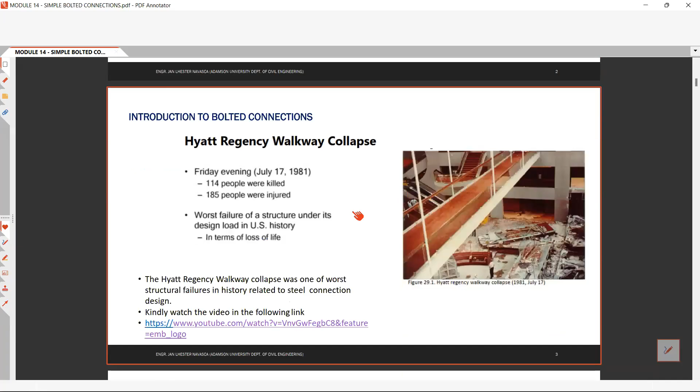So we have the Hyatt Regency walkway collapse. It is the most destructive, the worst.

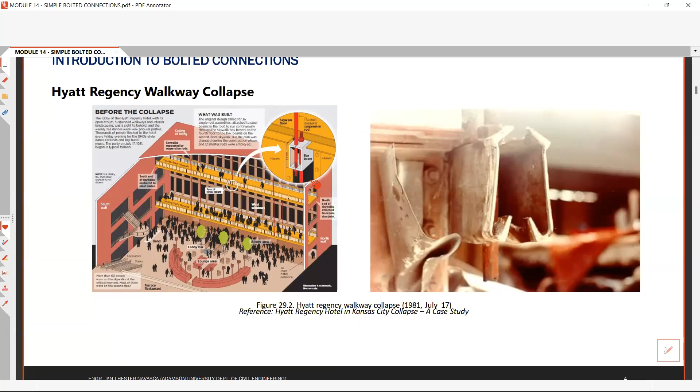So what happened at this walkway? It is a walkway on a three-story building. They have a walkway on the second floor and a walkway on the fourth floor. So what happened in the Hyatt Regency walkway collapse? According to the investigation, the design implementation, the construction or the implementation of the design was not implemented correctly. The plan was not followed.

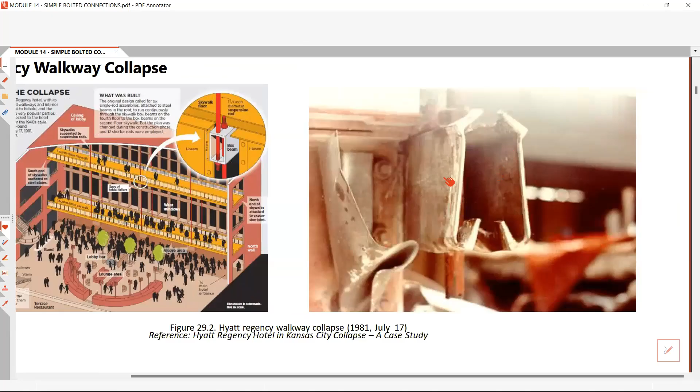As you can see in this figure on the left, they have a box beam. The box beam failed by tearing apart. Notice that your box beam tore apart, because the box beam was not designed in this manner. In the first design, the original design, the continuity of the tension rods and the bolts should be in a continuous manner. So this is the original design.

In the original design, in your box beam, let's say this is your box beam, the flow of the load path, the load path of the tension rods should be in continuity. The tension rod and bolts should be continuous all throughout.

Just like this one. However, in the construction, the contractor changed the initial design to discontinuity. So they have a tension rod on this point, and on the second, they separated the continuity of the load path.

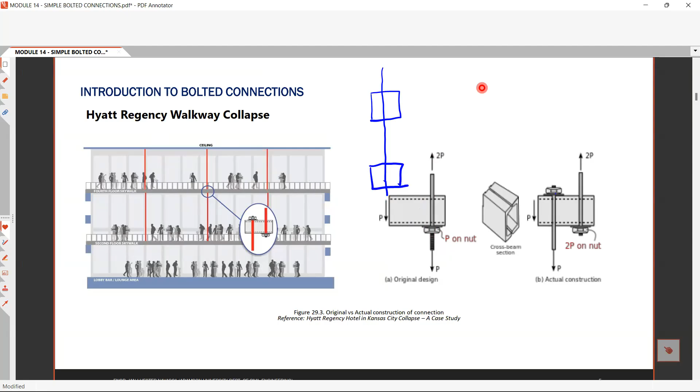So what will happen? If we try to examine the free body diagram of the walkway, in the original design, the tension rod should carry the load, this 2P and P on the other side, and so summation of forces vertical equals 0: the 2P, then your P at the bottom. So P plus P, therefore considering this force diagram, your bolts carry the load P.

However, in this actual construction, the load on the bolts is doubled, because they discontinued the load path. So if you check, when you apply a load P over here, then also over here P, so summation of forces vertical, you have 2P on the bolts. That is why you have 2P on the nut on the fourth floor.

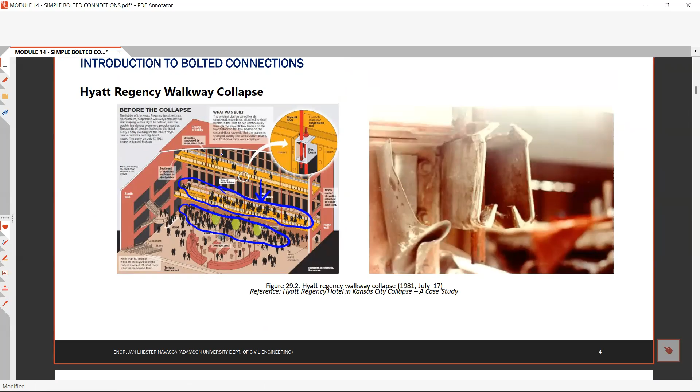Okay so that is the importance of construction implementation, because you need to really check the design and the construction. So whatever is in your design, this has to be properly implemented in the construction.

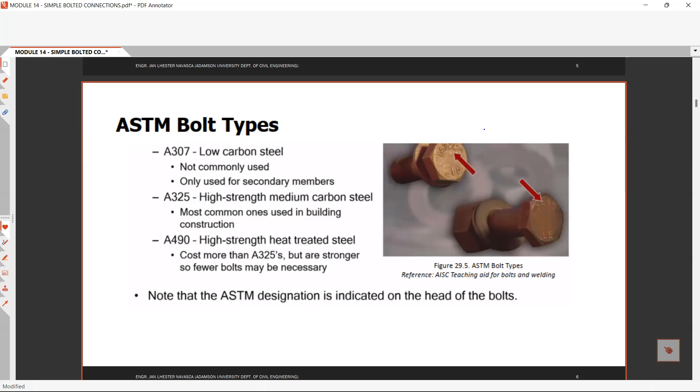Also, for the ASTM bolt type, we have the A307 machine bolts with an FT of 45 KSI, where FT means the tensile capacity of your A307 machine bolts.

So when you look at the AISC 15th edition, the bolt types are classified into Group A and Group B. In Group A, which is the high strength bolts, the tensile capacity is 90 KSI. And for Group B, it is also a high strength bolt, with a tensile capacity of 113 KSI.

So what are the ASTM bolt types under Group A? The ASTM bolt types under Group A are the ASTM A325, the A325M, F1852, A354 grade BC, and the A449.

And the ASTM bolt types under Group B are the ASTM A490, the A490M, the F2280, and the A354 grade BD. Again, FT is the tensile strength from the AISC table, which you can check in table J3.2. Take note that F1852 and F2280 are tension control bolts, or twist-off bolts, which require a special tightening tool.

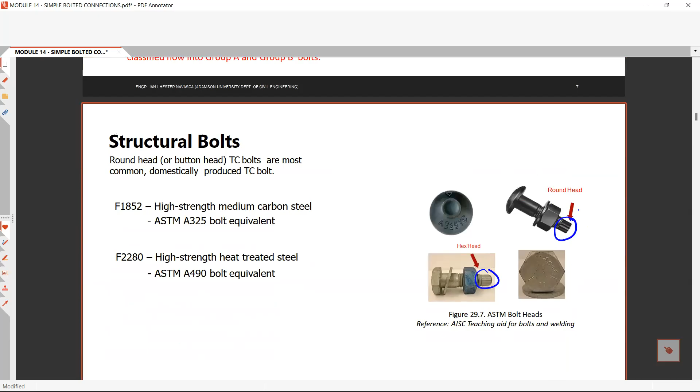Then we also have the round head, like this structural bolt. So we have a round head and a hex head. The round head types are the F1852 and the F2280.

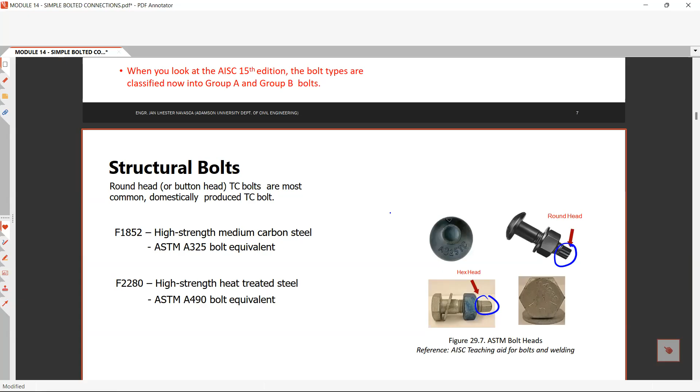So if we compare the F1852 to the ASTM bolt type, the equivalent of F1852 is the ASTM A325 - it is its bolt equivalent. And for the F2280, we have the ASTM A490 as its bolt equivalent.

Okay, so let us check the anatomy of a bolt assembly. This portion is what we call the head - this is the part you will see on the surface of your structural steel connections. We also have the total length of the bolt.

This is your total length of the bolt. So if the structural plans indicate the length of the bolt, it means the length is measured from the bottom of the head up to the tip of your bolt assembly. Then, between the length, we have the non-threaded part, and we have the threaded part.

Also, if you tighten the nut of your bolt assembly, this is the total grip distance. For example, if you have a timber or wooden structure and you need to tighten the nut, you need to create the bolt connection. So what you have to do is tighten the nuts, and the distance of your tightened nuts is the grip - that is the grip distance, the distance that holds the bolt assembly together. That is what is called the grip distance.

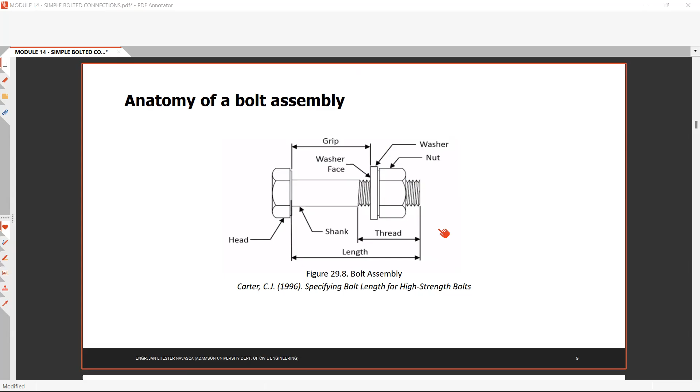So what are the standard dimensions for the ASTM bolts? In this table, check the AISC manual, table 7-14. In the AISC manual, the dimensions of the high strength fasteners are in inches.

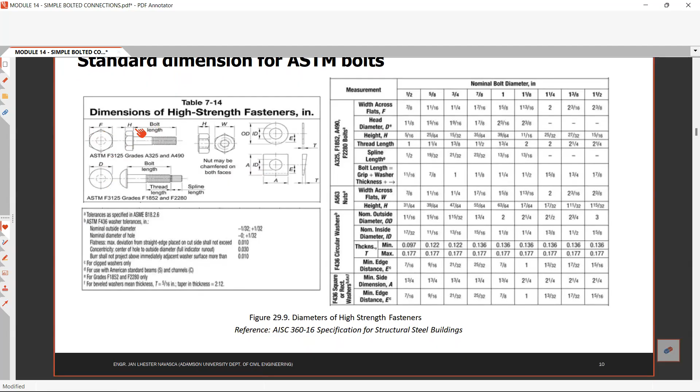It has a notation F, which is the width across the flats. We have the notation D, which is the head diameter. We have the notation H. The notation H is basically the thickness of your bolts, the thickness of your heads, the thickness of your head bolts. And thread length is the total length of the threaded part. Also we have the bolt length, which is the grip distance plus the washer plus the thickness, or basically the length of your bolt.

So in this table, we have the standard dimensions for the ASTM bolts, depending on the ASTM bolt type and the nominal bolt diameter. Let's say for example we have a bolt diameter of 1/2. So when you check the standard dimensions of 1/2 inch ASTM bolts, it depends on the ASTM type.

So let's say we have ASTM A325, 1/2 inches. If you check the standard dimension of that ASTM bolt, we have 7/8 width across the flats, a head diameter of 1 1/8, a height of 5/16, a thread length of 1 inch, a spline length of 1/2, and a bolt length of 11/16 inches.

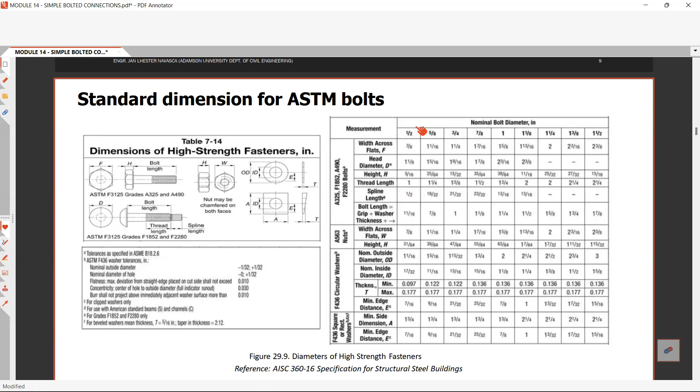So this is the head diameter. As you can see, the head diameter is always greater than the bolt diameter. This is your bolt diameter, and this is your head diameter.

So we have categories based on the performance of your bolts. We have a bearing type connection and we have the slip critical type connection. The bearing type connections are simple bolted connections in which the load is transferred by the bearing force on the bolts. And the slip critical type of connection is where the load is transferred by the friction in the joint.

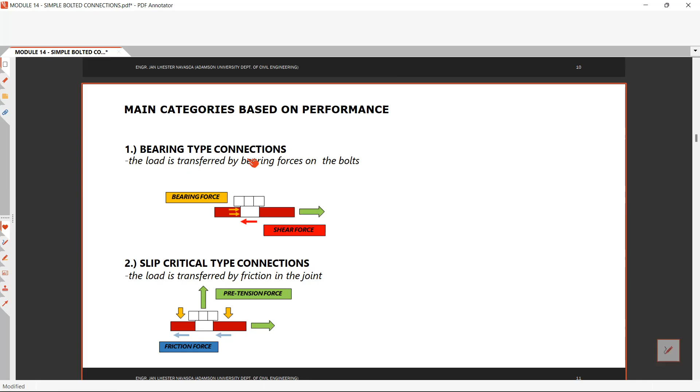So this is the slip critical and this is the bearing type connection. So basically, the bearing type connection means you are allowing your bolt to slip. That's the bearing type. And the slip critical type of connection means you will not allow your bolt to slip. So what are those?

Let's say you have slotted holes, and on your slotted holes you have a bolt. This is your bolt. So if you have a bearing type connection, based on your assumption, you are allowing your bolt to bear the force on the edge of the holes, here at the slotted holes.

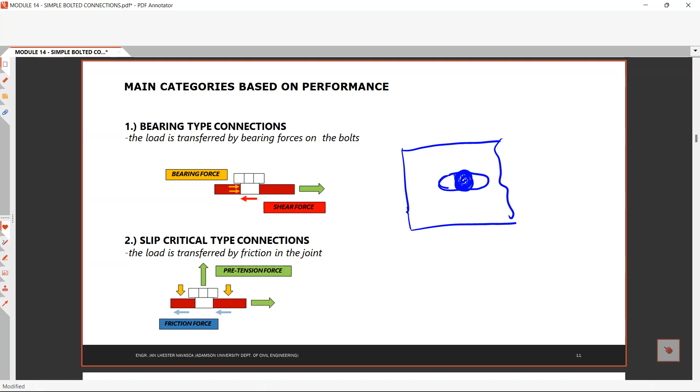You are allowing it to slip, meaning it can slip on this side, moving a certain distance. So this is exaggerated, but you will allow a bearing force. Your connection is designed to resist that bearing force.

However, for the slip critical type connection, you are not allowing your bolt to create a bearing interaction or bearing stresses at the holes. So by the word itself, it is critical to slip. This is also an exaggerated figure, meaning your hole should not slip. Therefore, you need a pretension force, a high pretension force.

Your pretensioning force needs a special tool. So when you have slip critical type connections, a wrench is not applicable for tightening your bolts. You need a special tightening tool and you need to check the pretension force, and that pretension force will cause a clamping force in the bolt type.

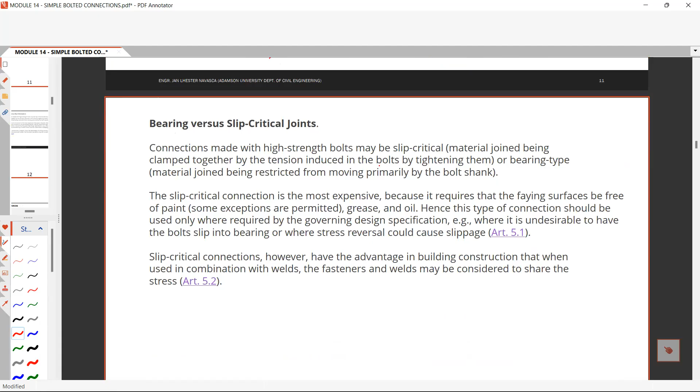Connections made with high strength bolts may be a slip critical type, with the material joined clamped together, or a bearing type, which is a material joined restricted from moving primarily by the bolt shank. That is the bearing type.

The slip critical type of connection is the most expensive because it requires the faying surface to be free of paint, with some exceptions permitted, grease, and oil. This means the slip critical type is most expensive because you need to recheck the faying surface under your bolt type connection. You need to recheck this because it should be free from paint, except red oxide paint, grease, and oil, because these will cause unnecessary frictional coefficient, lowering the frictional force in your clamping for your slip critical connection type.

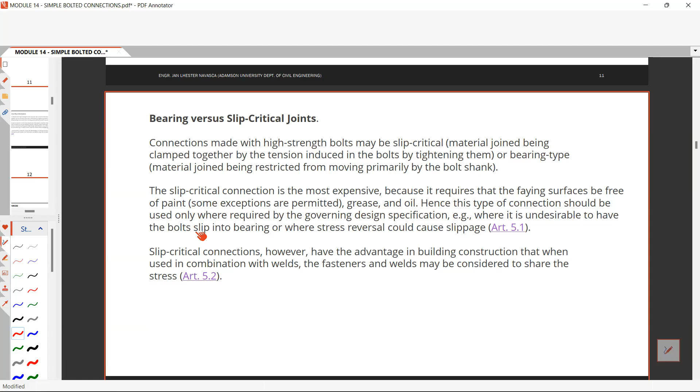This type of connection should be used only where required by the governing design specification, for example where it is undesirable to have a bolt slip into bearing, or where stress reversal could cause slippage. Slip critical connections have the advantage in building construction that when used in combination with welds, the fasteners and welds may be considered to share the stresses. Since slip critical connections require a special tool, a pre-tensioning force, and a controlled environment, they have this advantage in building construction.

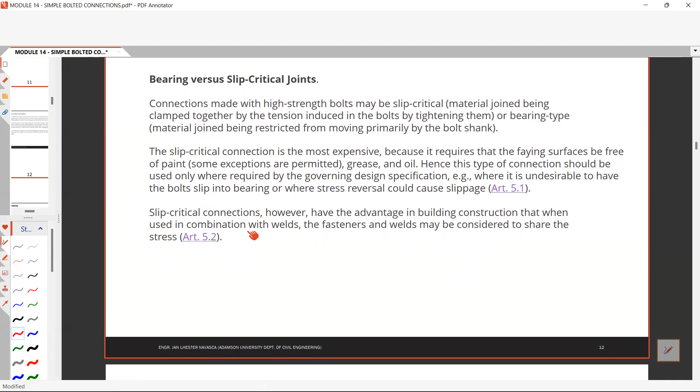So let us understand what the bolt forces are. Because of the nature of structural bolts, we generate three forces in a bolt assembly: the shear in the bolts, the bearing between the bolt and the plate, and the friction between the faying surfaces of the connection elements.

The shear in the bolt is the shear right here in the bolts. The bearing between the bolt and the plate is here. And the friction between the faying surface and the connected element is this one. Let us consider all these bolt forces.

Let us consider the bolt forces. For example, we have a tension force in our bolts. That tension force comes from the actual load conditions, in our bolt assembly. So we have a bolt and we have the connecting element.

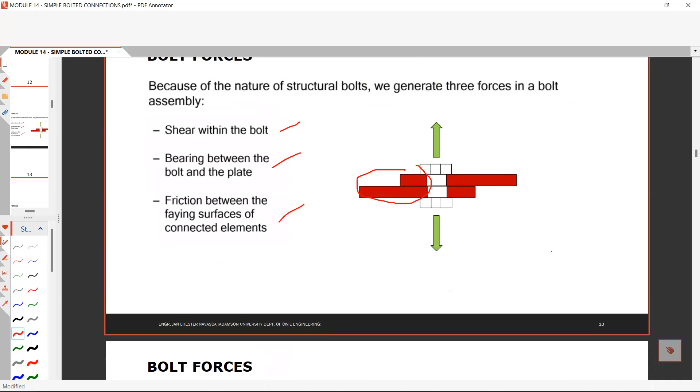When you have a tension force applied on the bolts, by reaction forces, you have a clamping force, right? That clamping force is this yellow arrow, your clamping force in the bolt assembly. So by summation of forces vertical, the tension force should be equal to your clamping force.

Then, let's say for example you have a tension force on the member, if you recall in our prelims, this type of connection, then you apply a tension force T. If you want to check the capacity of your bolt, to design the bolts under an actual loaded tension member, let's say this is your tension member with tension force T.

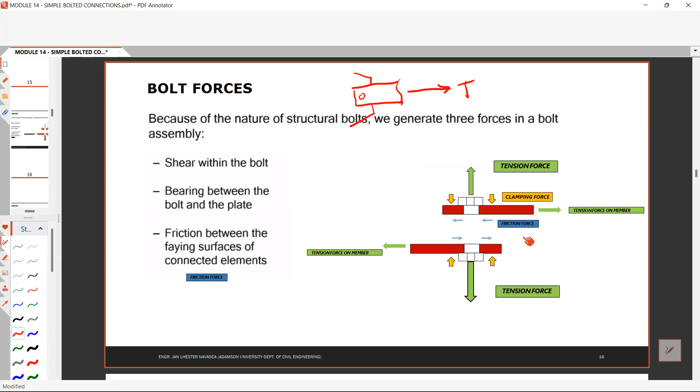By summation of forces along the horizontal, or by equilibrium, the reaction forces are the frictional force between the faying surface of the connected element, this blue arrow. Consider the bottom part of our connection: you have a tension force on the left, a frictional force on the right. The same on the upper part: tension force on the right, friction force on the left. That friction force equals mu times N, your friction force.

Then we have the shear within the bolt. Since you have a frictional force, that frictional force will pass through the bolt, within the bolt. That stress will pass through the bolts, therefore you have a shear within your bolts, right below your bolts within your bolts. That is your shear force.

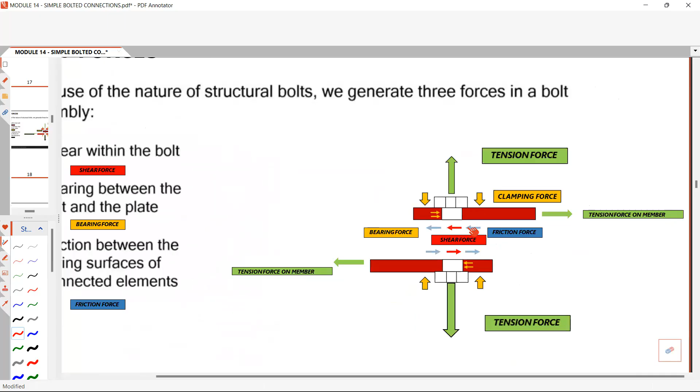For the bearing between the bolt and the plate, since you have a shear force within the bolt, that shear force will cause a small lateral movement on the bolt. Therefore, you have bearing stresses right between the bolt and your connecting plate, just like this figure. If you check your holes, this one is your hole, your bearing is the stresses here, acting on this side.

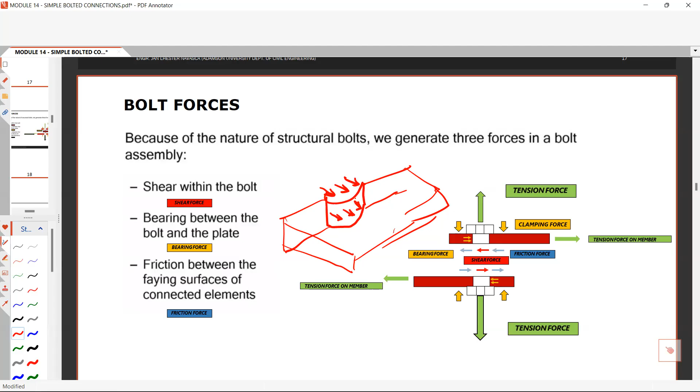So for example, you have your holes here. This is your hole. So you have now the shear force within your bolts. Therefore, there is bearing stresses between the bolt and your connecting plate. So that is the bearing force.

Under the bearing type connections, bearing type connection is basically the simplest connection type of bolted connections, easy to design. Bearing type connection meaning you are considering the bearing forces on the bolts, between the bolts and your bearing plate or connecting plate.

So if you want to design a bearing type connection, number one, you need to check the tensile strength of your bolts or the threaded parts. It is the same as what we designed in the first part of our prelim on tension members, where I already introduced the tensile strength of the bolts of the threaded parts.

If you go back to table J3.2, you have the nominal stress, description of fasteners, and the nominal stress on shear. This is the nominal stress on tension, and this is the nominal stress on shear. Since this is nominal, you will multiply it by a factor phi and divide it by safety factor omega in LRFD and ASD respectively. Take note that group A are the ASTM A325, and group B is this one. So basically, Rn equals Fn times the area of your bolts.

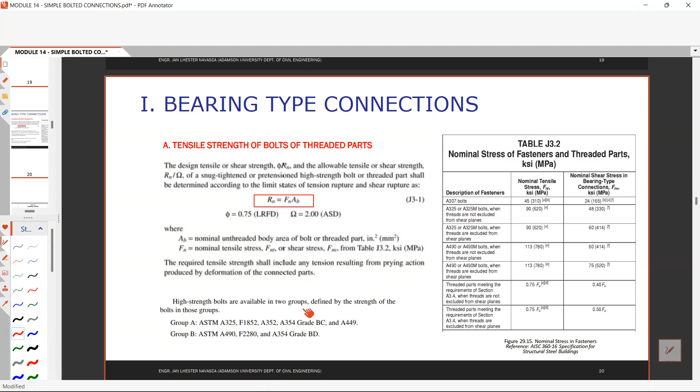Also, table 7-2 of the NSCP, the AISC, has available tensile strength of bolts based on the designation. So for group A, you already have a tensile capacity depending on the diameter of the bolts, and the same with group B, group C, and A307. In table 7-2, they also introduce group C, which includes the ASTM F3043 and the ASTM F3111.

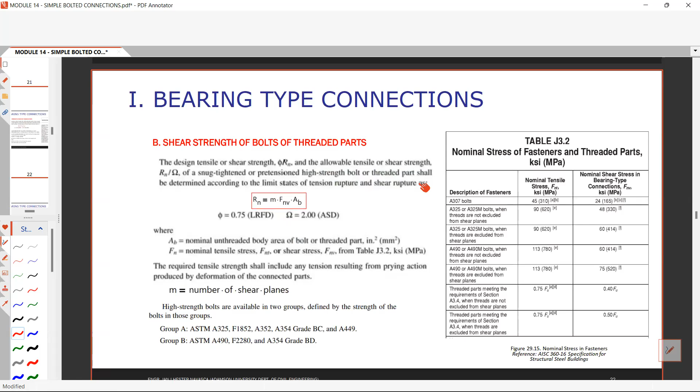Number two limit state of the bearing type connections is the shear strength of the threaded bolts. We already solved the tension, and we also need to solve the shear force, which is the shear strength of the bolted and threaded parts. Check table J3.2 again, which includes the nominal shear stress of different descriptions of fasteners. Basically that has a formula of M times Fnv, which is this table, times the area of your bolt.

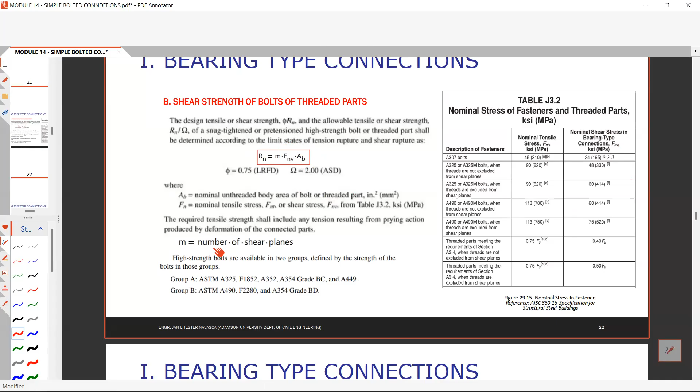So what is this M? Your Fnv and your area, you already know those. The one you don't know is M, which is the number of shear planes. So what are the number of shear planes, and how do you determine that number?

For shear strength of bolts under threaded parts, to account for the number of shear planes, you need to check if that is a single shear or a double shear. These are the commonly used types of bearing connections. A single shear means you only have a single shear plane, right in the middle. Only these surfaces rub against each other when you apply a tensile force, and that plane will only cause shear.

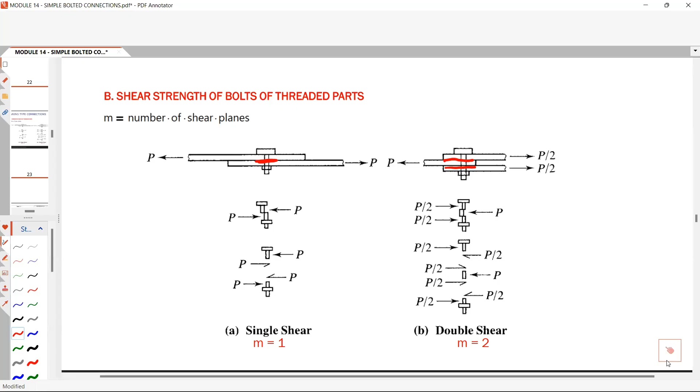Then we also have a double shear. For example, with this type of connection, you have three plates. So how many shear planes are there? Number 1 and number 2. So you have two planes that rub against each other when you apply a tension load P. That is your shear plane.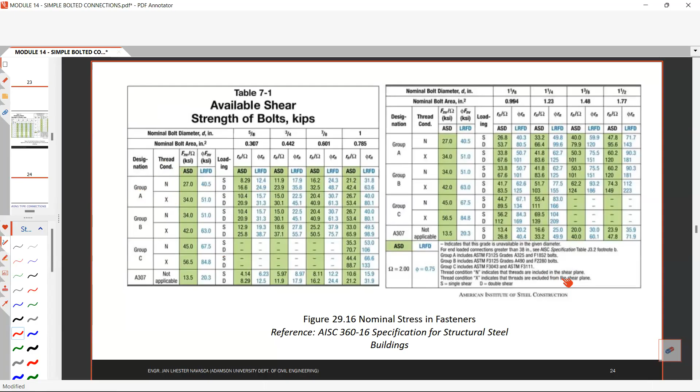Let's say your ASTM designation is under group A with threaded conditions, meaning you have a threaded part. N means you have threads in the shear plane, meaning the thread reaches the shear plane. Did you get that, class? The thread reaches the shear plane. So for example, this is our shear plane.

So meaning your bolt, the threaded part reaches there. So let's say, for example, the thread is there, so your threaded part is within that shear plane.

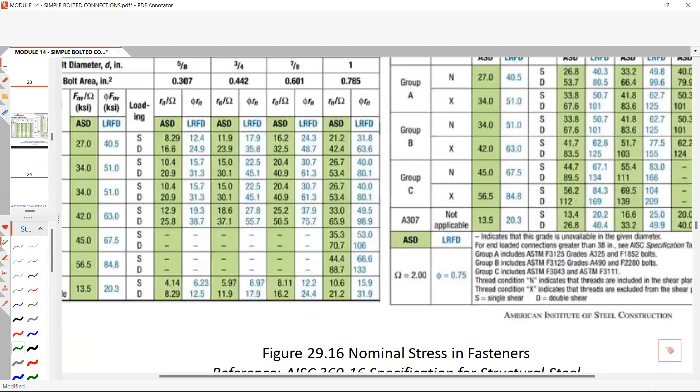This is also indicated in this table. N is the condition where your threads are included in the shear plane, and X indicates that it is excluded from the shear plane. So if you notice, class, when you have a threaded part, your capacity decreases compared to the condition where you have excluded your threads from the shear plane, because when you have threaded parts, the area of your bolt decreases, that is why you have lesser capacity.

But it's a small amount. How much is this? 5 KSI, 8 KSI, so actually quite significant. 8 KSI, this one is 10 KSI, so quite significant. That is the available shear strength of the bolts in kips.

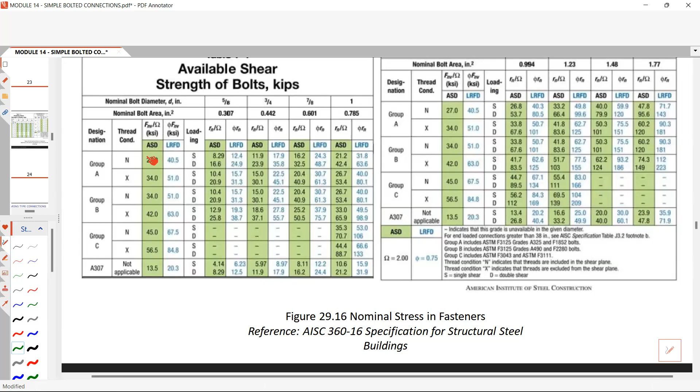So S means single shear and D means double shear. These are your loading planes, S for single, D for double shear. That is how you will use this table 7-1.

Lastly, we have bolt bearing limit states. If you don't check the bolt bearing limit state, you get bolt tear out and hole ovalization, where your hole becomes enlarged. This is just like what happened in the Hyatt collapse, where the box girders experienced tear out because of bolt bearing failure in the connection. Again, this is your bearing force, take note of this one.

This is your bearing force. Basically, the bearing area is the diameter of your hole multiplied by the thickness T. That is your bearing area.

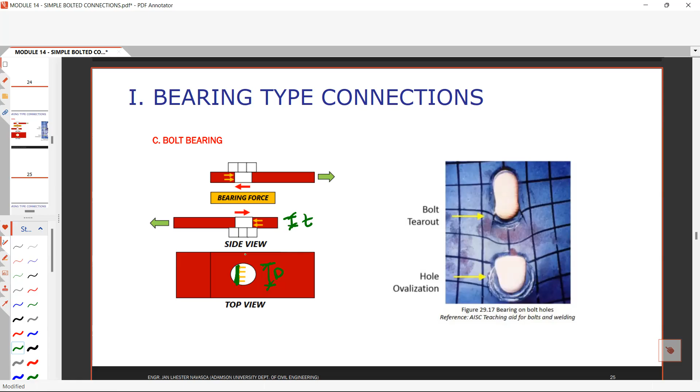Under AISC design, we also need to discuss how the plate itself can fail: number one, by tearing out, and number two, by hole ovalization. So under bolt bearing, you have two considerations to check: bolt tear out and hole ovalization. Just like in tension members, the bolt tear out is the fracture or tearing capacity of your connection, and the bolt hole ovalization is similar to yielding.

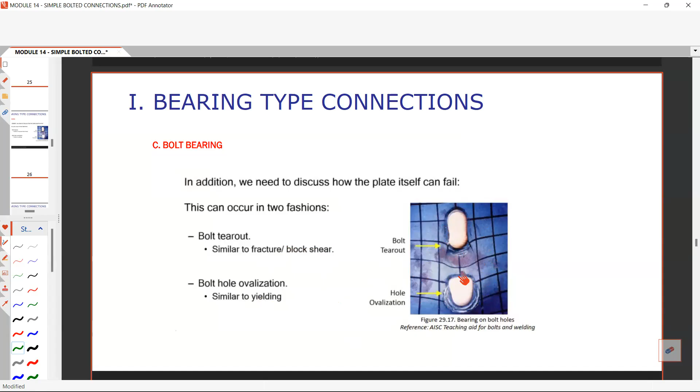So bolt tear out is the same as fracture and block shear, and hole ovalization is the same as yielding. For the bolt bearing type, when deformation on the bolt hole at service load is a design consideration, your Rn, your nominal capacity, is equals to 2.4 times D times the thickness times Fu, which is the diameter of the hole times the thickness times Fu. In LRFD, your phi factor is 0.75, and in ASD, your omega factor is 2.0. When deformation at the bolt service load is not considered, your formula is 3dt times Fu.

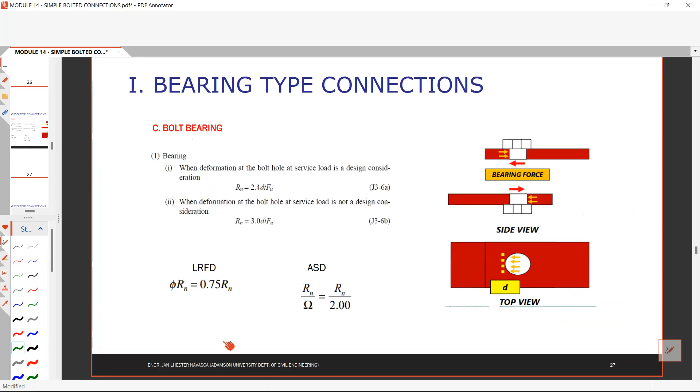Under the tearing out failure, this is the bearing failure, this is the tearing out failure. This one is just like the hole ovalization, and this one is based on the tear out of the bolt.

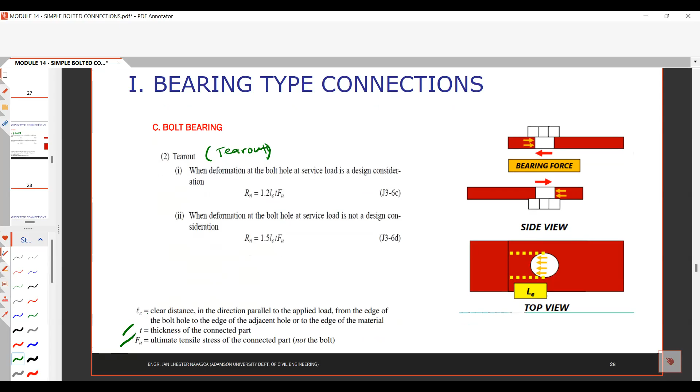Okay, so under the second fashion of bolt bearing failure, when the deformation is considered, your Rn is equal to 1.2 times the clear distance LC times the thickness of the connected part T, times Fu, the ultimate tensile stress of the connected part. Take note, your T is for the connected part, and your Fu is for the connected part and not for the bolt, because in tearing, you are considering the tearing of the plate or the connected part. That is why T is the thickness of the connected part, and Fu is the tensile stress of the connected part, not the bolt.

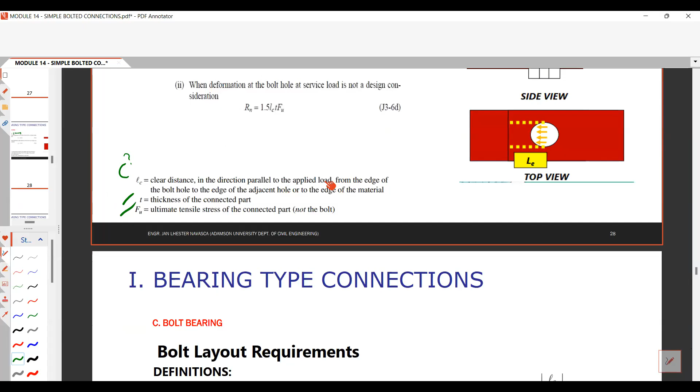So how do we determine LC? LC is the clear distance in the direction parallel to the applied load, from the edge of the bolt hole to the edge of the adjacent hole or to the edge of the material.

Let's discuss this. Before we find LC, we need to determine the bolt layout requirements and definitions. We have S, which is the spacing; LC, the clear distance; and LE, the edge distance. This LC is what we are looking for.

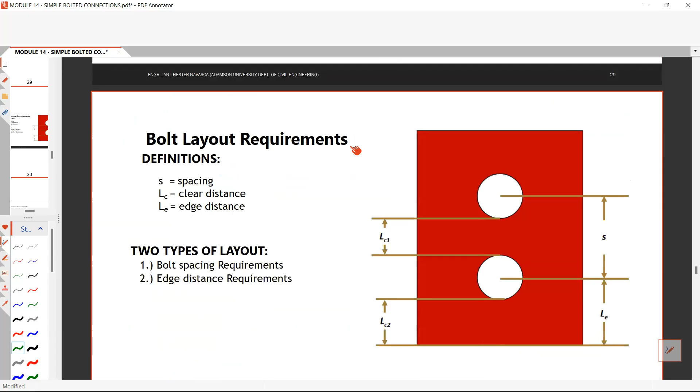LC is the clear distance in the direction parallel to the applied load. So if you have an actual tensile load T, this is parallel, meaning you have your LC1 and LC2.

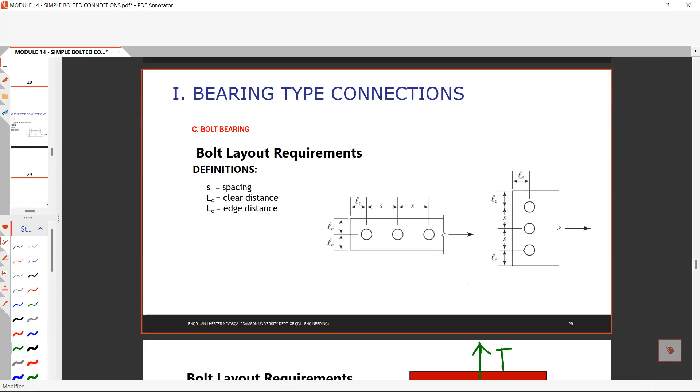In our example, you have this type. LC is the clear distance from the edge of the bolt hole to the edge of the adjacent hole or to the edge of the material. So if it's like this, this is the LC, parallel to the direction T, and that is the clear distance from the edge to the hole, or it can also be from hole to hole.

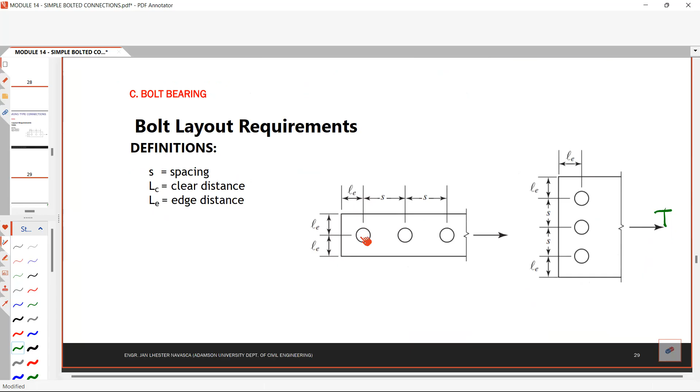So before knowing LC, you first need to know LE and S. LE is the edge distance measured from the center of the hole, and S is the spacing measured center to center of the hole.

There are two types of layout: the bolt spacing requirements and the edge distance requirements. There are requirements you need to check when designing your bolt. When you lay out the holes, there are requirements; you can't just drill holes anywhere in the connection. For the bolt spacing requirements, the minimum spacing between the centers of standard, oversized, or slotted holes shall not be less than 2 2/3 times the nominal diameter D. But the NSCP recommends using 3 times D, because 2 2/3 D doesn't give an exact value.

So they round it up to 3D. For example, if you have a 1 inch bolt diameter, 1 inch times 2 2/3 is basically 2.67 inches, which is difficult to measure exactly on site. That's why they round it up to 3D — for example, 1 inch times 3 is 3 inches, which is easy to lay out in construction. So that is your minimum spacing.

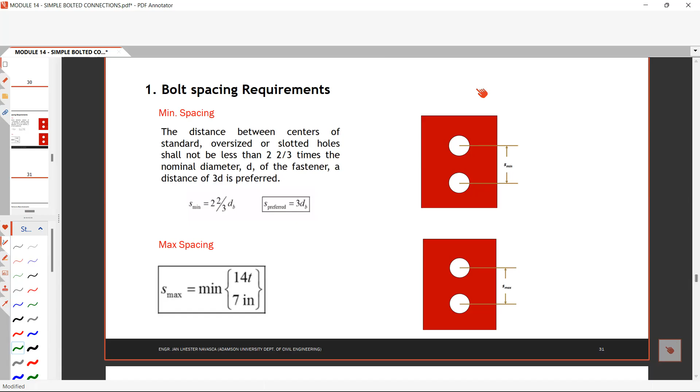For the maximum spacing, it is the minimum of 14 times the thickness and 7 inches. That is your bolt spacing requirements. For the minimum edge distance requirements, you check Table J3.4, which lists the minimum edge distance based on the bolt diameter. The maximum edge distance is basically the minimum of 12T and 6 inches. That is how to find the edge distance requirement.

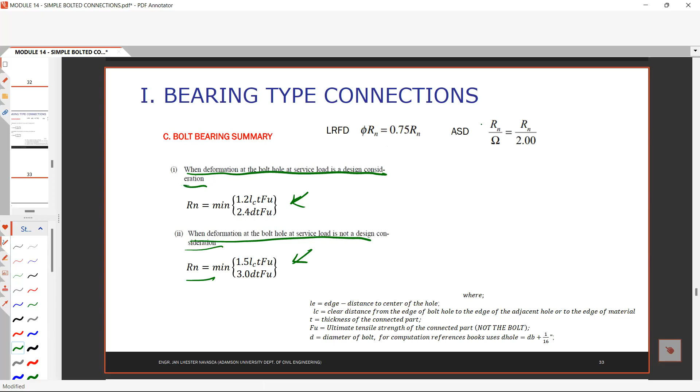So in summary, the bolt bearing capacity check is basically comparing the minimum of 1.2 LC T Fu and 2.4 D T Fu when the deformation of the bolt hole is considered — that applies if you are considering the deformation. When the deformation of the bolt hole is not considered, this is your Rn, the minimum of these. Your phi is 0.75 for LRFD, and your omega is 2.0 for ASD, whereas your LE, again, is the edge distance measured to the center of the hole.

LC is the clear distance from the edge of the bolt hole to the edge of the adjacent hole, or edge distance of material, or hole to hole distances. T is the thickness of the connected part. And FU, take note again, is the ultimate tensile strength of the connected part, not the bolt.

D is the diameter of the bolt. For computation, reference books differ in how they use D. In some books, D uses diameter of the bolt, and in others, D uses diameter of the hole. It depends on the designer or which book you check, but for me, the best and right way to design is using diameter of the hole.

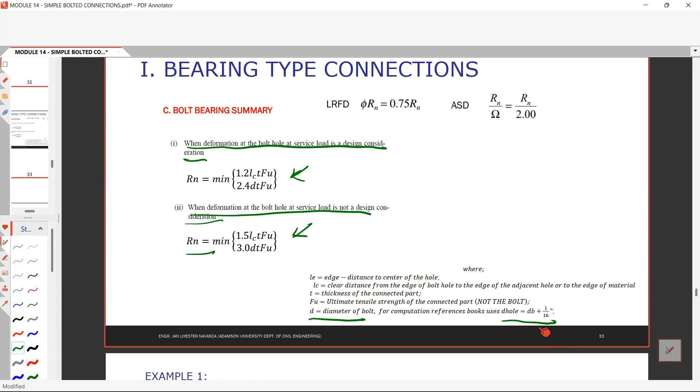Okay, so let us try to solve example problem 1. We still have time.

Example problem 1: let us check the bolt spacing, check the edge distances, and check the bearing of the connection shown in this figure. It is a plate 5 by 1/2 with 4 holes. The dead load is 15 kips, the live load is 45 kips, using A36 steel, and the diameter of the bolts is 3/4 inches. As you can see, we have a layout indicated in this figure, and take note that we will consider deformation of the bolt hole.

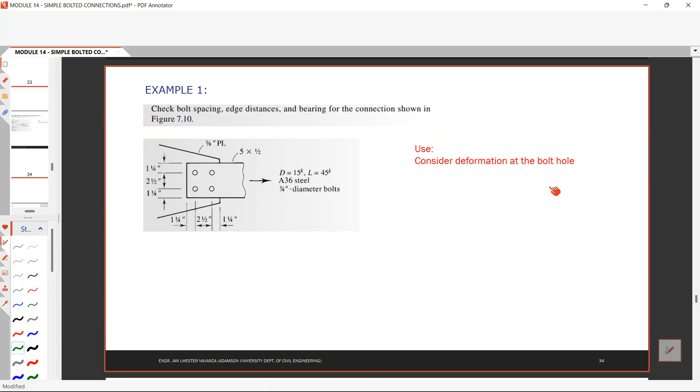Okay, so let us check first the bolt spacing. From AISC J3.3, the minimum spacing in any direction is 2 2/3 d. So 2.667 times 3/4, that is 2.0 inches.

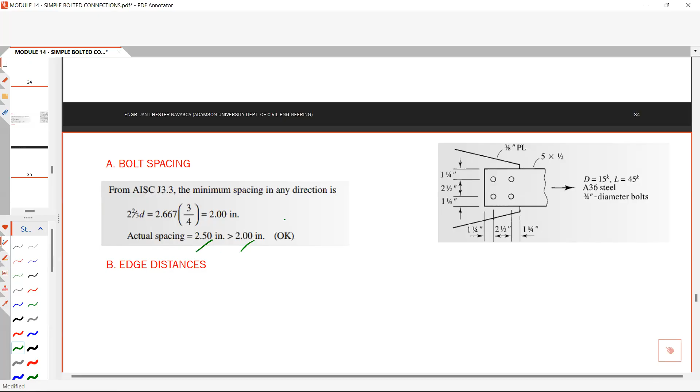If we check the actual spacing, spacing is the center to center spacing of the bolts parallel to the loading direction. So this is the loading direction, and our spacing here is this one, equivalent to 2.5 inches. Therefore, your actual spacing is greater than your minimum spacing, so that is okay.

And if you want to check the maximum spacing, the maximum spacing is minimum 14 T or minimum 7 inches. So our plate, our connection type, still fits. 14 T is equal to 14 times 1/2, that is 7 inches, and minimum is 7 inches. Therefore our S max is 7 inches, and our actual spacing is still less than S max of 7 inches. So that is how you solve for S max.

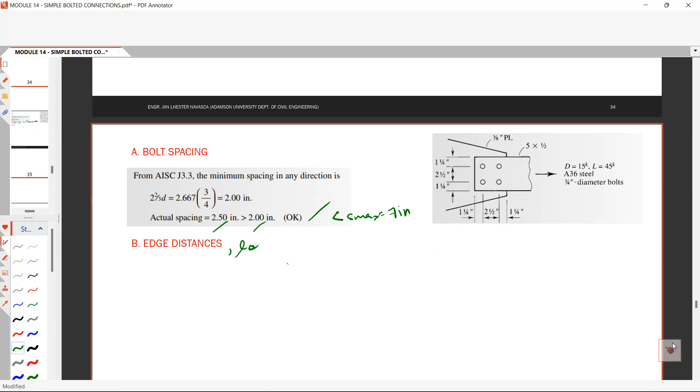Next, let's check the edge distances, denoted as L sub E. L sub E is the distance measured from the center of the hole to the edge of your connection, which is perpendicular to the loading direction.

So it's just like the gauge distance. Sorry, it's not the gauge distance because it has to be to the edge. Gauge distance is perpendicular on the sides, so similarly edge distance is also perpendicular to the loading direction.

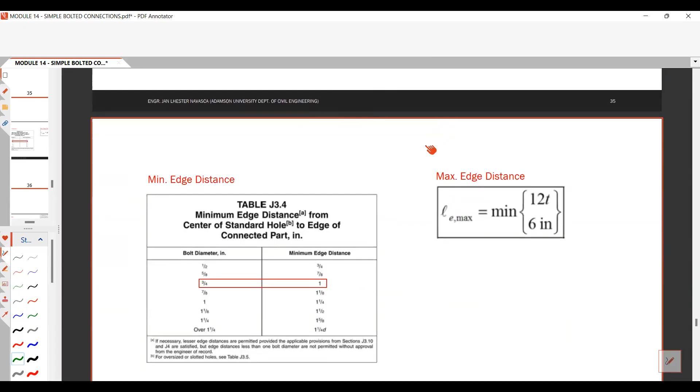Your L sub E is the edge distance. If we check the minimum and maximum edge distances using table J3.4, for 3/4 inches you have a minimum edge distance of 1, and for maximum edge distances you have a minimum of 12 T and 6 inches. Let us check this.

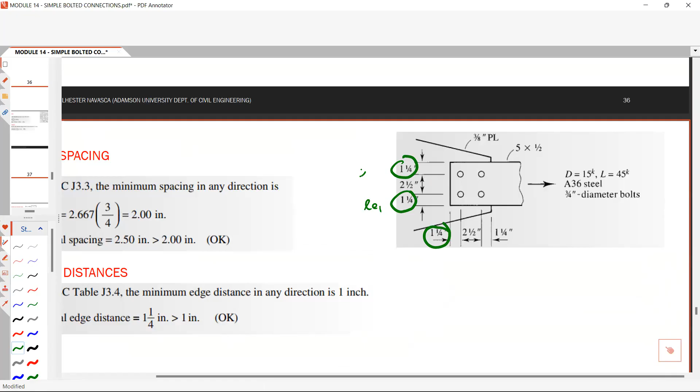For the edge distances, your actual edge distances are 1 1/4, 1 1/4, and this other one is 1 1/4. These are the edge distances: this is LE1, LE2, and this one is LE3. They are all greater than the minimum edge distance of 1 inch, so that is okay.

Let's also check the maximum, that is 12 times T and 6 inches, which is still less than the maximum. Now we need to solve for the deformation at the bolt hole, and determine the nominal required bearing force.

Okay, so there are basically 4 approaches we need. We need to consider 4 cases. So why do we need 4 cases? Since the gusset plate and the tension member have different thickness and we have 2 different length LC.

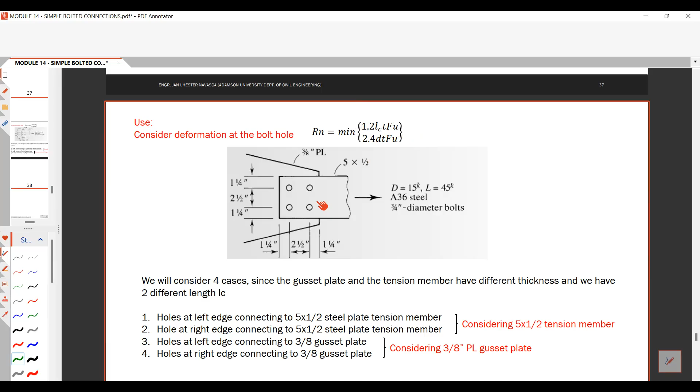Okay, so let's look. What is LC? Isn't LC the center to center distance from bolt to bolt or from bolt to edge? So this is LC, right? From bolt to bolt and from bolt to hole. So this is LC, right? Our LC is the clear distances.

Okay, sorry, it should be clear distances. I got confused with center to center. Okay, so we need to find the clear distances. So what are the 2 clear distances?

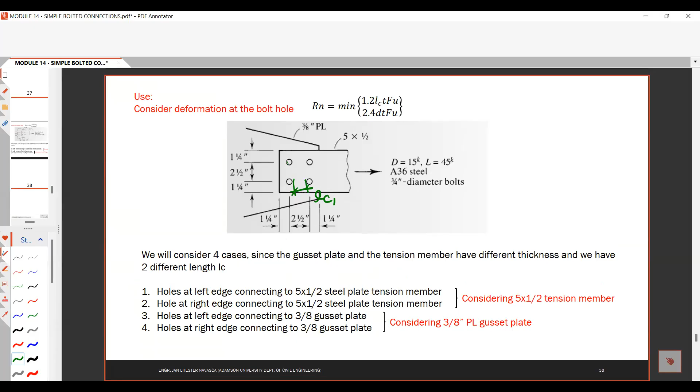This is one, this one. This is your first clear distance. This is your second clear distance. Okay, so those are the clear distances, just like this one, if you can see this. Okay, this one, this is your clear distances. So same with the problem, we have 2 different clear distances. Okay, this one and this one. Okay, so they are different lengths.

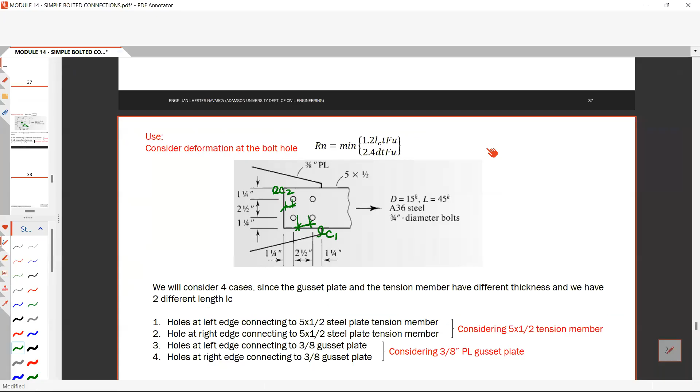And also if you check the formula, okay, using consideration of the bolt hole, you have this formula, right? Okay, so that is your formula and you need to check.

Okay, you have 2 different thicknesses. What are those? You have 2 different thicknesses. Number 1 is considering the 5 by 1/2 thickness. And number 2 is considering that gusset plate, the 3/8 inches gusset plate.

So basically, if we check this section, this is our section. This is your gusset plate. And this is your 5 by 1/2. Okay, so this is your 5 by 1/2 and this is your 3/8 inches plate. And between that, let's say you have a bolt. Between that, okay, you have a connecting bolt. And also this one.

So if you want to check the bearing forces in this orientation, in this bolt type, you have two thicknesses. You have two bearing areas. Number one is the bearing area on this. Okay, and number two is the bearing area on this one.

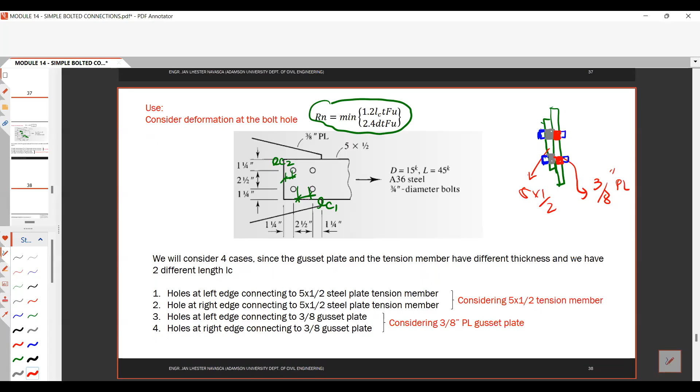So okay, so the holes, let us define what are those 4 cases. First case is the holes at the left edge connecting the 5 by 1/2 steel plate. So left edge meaning this distance over here, left edge, which is equivalent to 1 1/4 minus the bolt diameter over 2. This one, that is your LC2. Okay, this is for LC2, this is for LC2, and considering the 5 by 1/2 thickness.

Okay, next is LC1. Okay, this is your LC1, this is your LC1, and considering the 3/8 inches. Okay. So that is how you check the cases. So you need to check them one by one.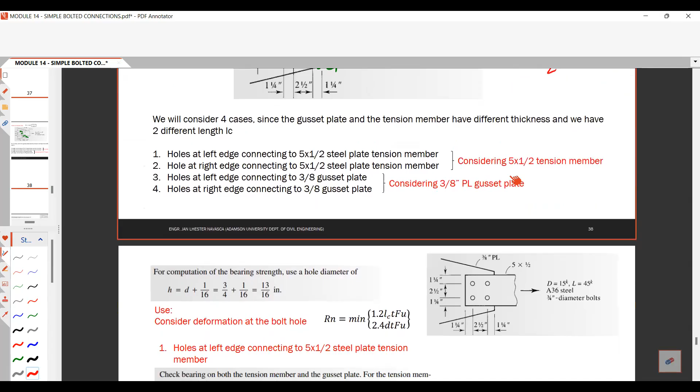Okay, so let us first try the first case. Okay, so the holes at the left edge connecting to the 5 by 1/2 steel plate from the tension member. So let us first solve the L sub C. So the L sub C is basically 1.25 minus the hole diameter. So some books use this one: D plus 1 over 16. So your D is 3/4 plus 1 over 16, that is 13 over 16. Okay, so therefore your LC sub 1, this distance, is equal to 1.25 minus 13 over 16 divided by 2, which is equivalent to 0.8438 inches.

Okay, now using this formula, 1.2 LC T FU should be less than or equal to 2.4 DTFU. Okay, so first check 1.2 LC TFU. So 1.2 times LC, then what is your thickness? Thickness of the connecting part. We're considering 1/2, that is 1/2. Your FU is 58 KSI. If you go back, your FU is the FU of the connecting plate, not the bolt.

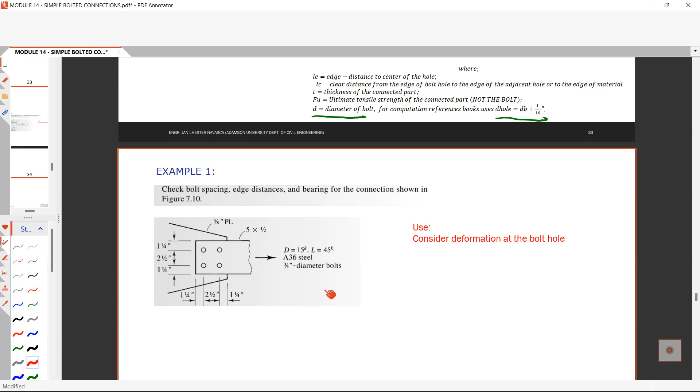So what is our FU? Okay, our FU is not stated in the problem. Okay, so the FU of this figure, PL 5 1/2, is 58 KSI. Okay, so therefore you have 29.36 kips. And checking the upper limit, which is 2.4 DTFU, 2.4 times 3/4 times 1/2. Your D is the diameter of the bolts, and the T is the thickness of the connecting part. So therefore, that is 52.2 kips.

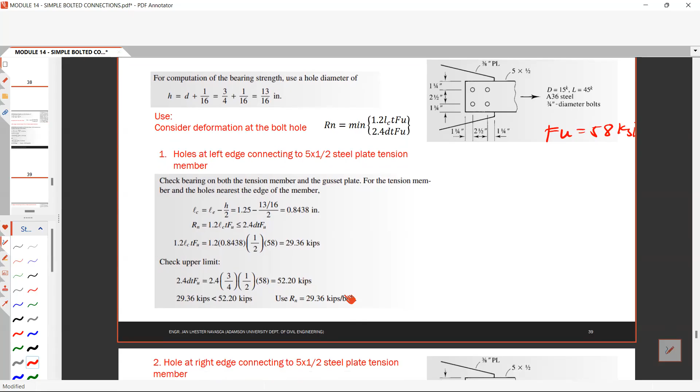Okay, so comparing and checking the minimum. Yes, therefore you will use 29.36 kips per bolt. So we are just considering one bolt, right? So that is 29.36 kips per bolt. Okay.

Number 2, the second case. The holes at the right edge, this one, or this one, still considering the 5 by 1/2 steel plate. Okay, so for other holes, you can check your LC, that is S minus H. So this time your 2.5 minus H over 2 on the other side. Therefore, that is the total H. And your LC is 1.688.

Then solve again the RN. So 1.2 LCTFU. Your FU is 58 KSI. Therefore, you have 58.74 kips. And the upper limit 2.4 DTFU, which is 52.2 kips. So therefore, choosing the minimum, that is 52.2 kips per bolt. Okay, using the minimum.

So the bearing strength for the tension member, considering the 5 by 1/2 steel plate, is 29.36 kips per bolt on the left side. There are two bolts on each side. And this one is 52.2 kips per bolt. Therefore your total RN considering the 5 by 1/2 plate is 163.1 kips.

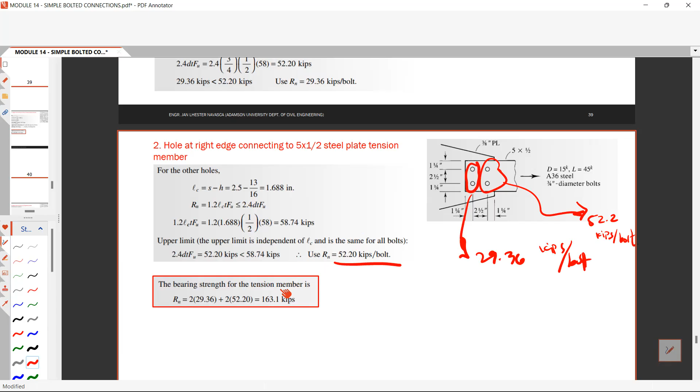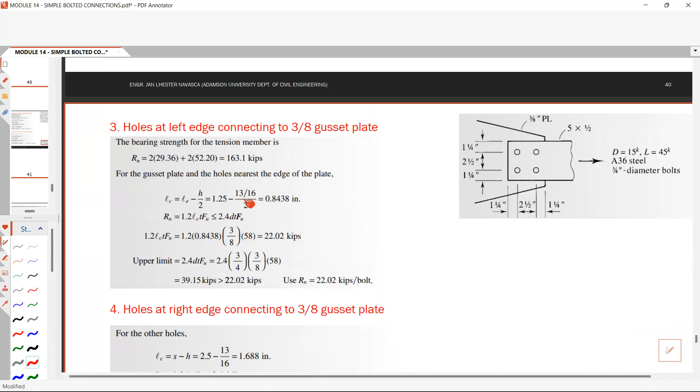Now considering the 3/8 gusset plate, we do the same process: find the LC, find the RN. This time LC equals LE minus H over 2, that is 0.8438, and your RN is 22.02 kips. The only thing that changes is the thickness T, and your FU should also be based on the thickness of the connecting plate, or the FU of your 3/8 plate.

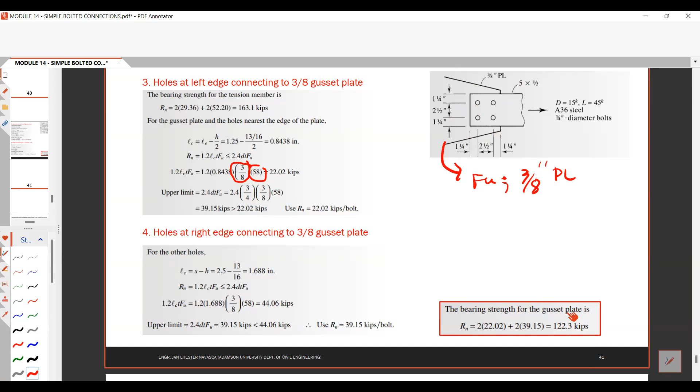Checking the upper limit, it arrives at 22.02 kips per bolt on the left side, and the holes at the right edge connecting the 3/8 inch gusset plate follow the same process as earlier. The only thing that changes is T, the thickness of the plate, which is 3/8 this time, giving you 39.15 kips. So considering 3/8 inches, you have 22.02 kips per bolt on the left side and 39.15 kips per bolt on the right side, therefore you have 122.3 kips.

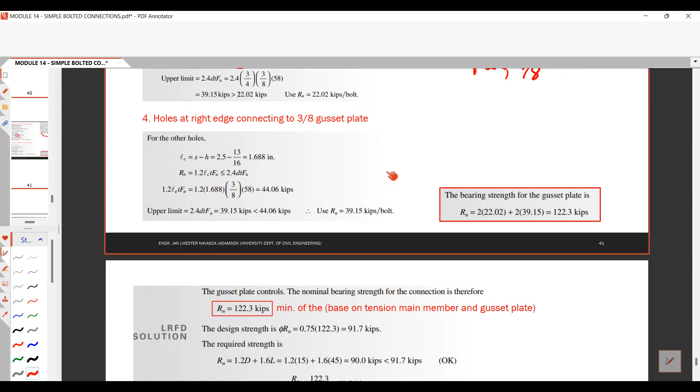So comparing the controlling RN, or nominal bearing strength, considering the 3/8 inch gusset plate versus the main plate, which is 163.1 kips, the gusset plate controls, and the governing nominal bearing capacity of the connection is 122.3 kips. It is the minimum of the base tension main member and the gusset plate.

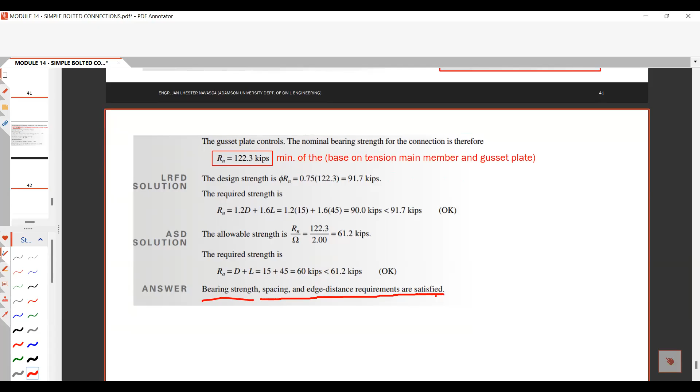Checking the design strength in LRFD, 0.75 times nominal is 91.7, and the required strength is 1.2 dead load plus 1.6 live load, therefore that is okay. For the allowable strength design, divide the nominal by 2.0, giving you 61.2 kips capacity, and checking the demand, dead load plus live load, you have 60 kips. That is okay. Therefore, the bearing strength, spacing, and edge distance requirements are satisfied in this problem.

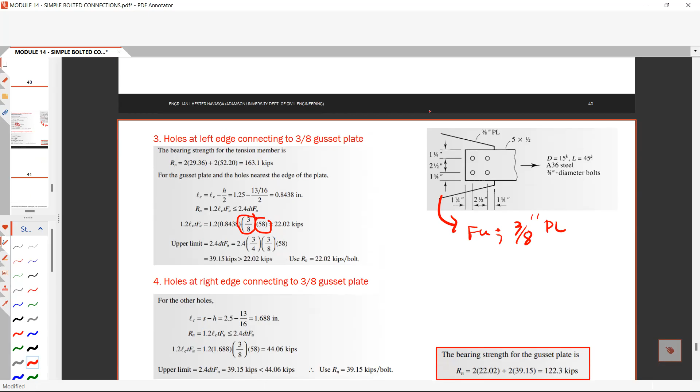So the question is, do we need to check all those cases one by one? The answer is yes, but there is a technique: you just need to check the thickness of both connecting plates. Let's say we still have the same material properties. When you compare 3/8 inches by 1/2 inches, it's obvious that 3/8 inches is smaller, so the governing thickness is 3/8 inches. You always consider the smallest thickness. This is only applicable if all the other factors are the same except for the thickness of the plates.

Do you have questions, class, regarding the simple bolted connections? Hello? Are you still there, class? Hello? Hello, boss. Okay, do you have questions regarding the simple bolted connections topic? Is there anything hard to understand in this topic?

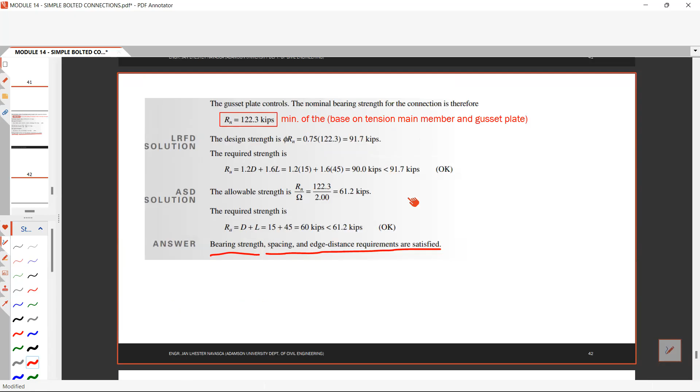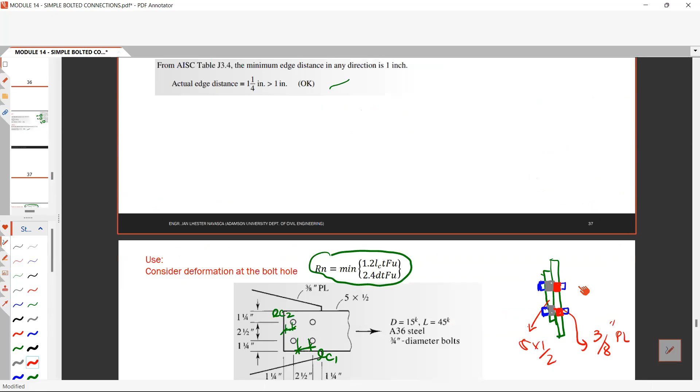So in summary, we need to check the shear, we need to check the tension, we need to check the bolt bearing capacity. Under the bolt bearing capacity, you need to check the hole ovalization and the fracture. You have two formulas: 1.2 LC times T times FU, and 2.4 times D times T times FU. And the other is 1.5 and 3.0, LC T FU and D T FU.

When you have connections with different thicknesses, you need to consider all cases. Just check the LC distances and the thickness, also the FU, if the material properties are different. What are the parameters? LC, T, then FU. Take note that your FU should be the FU of the connected or connecting part, not the bolt, and T is the thickness of the connecting part, and D is the diameter of the bolt.

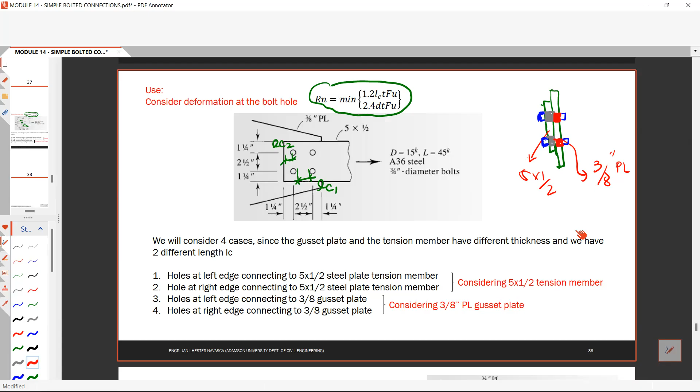To find LC, use the hole, and in this topic the hole is basically DB plus 1/16 inches. Okay, so that's it, and thank you guys for listening.